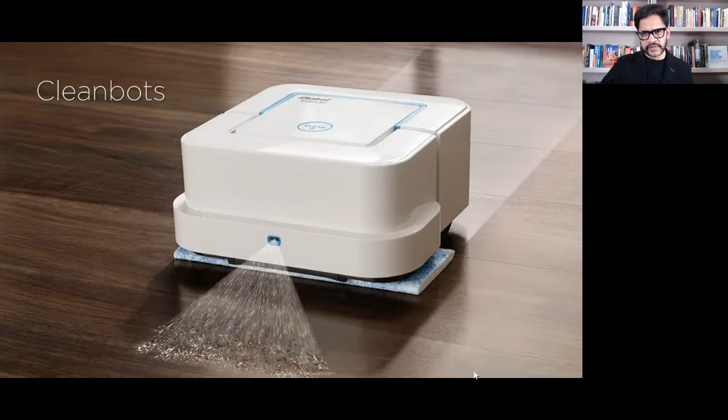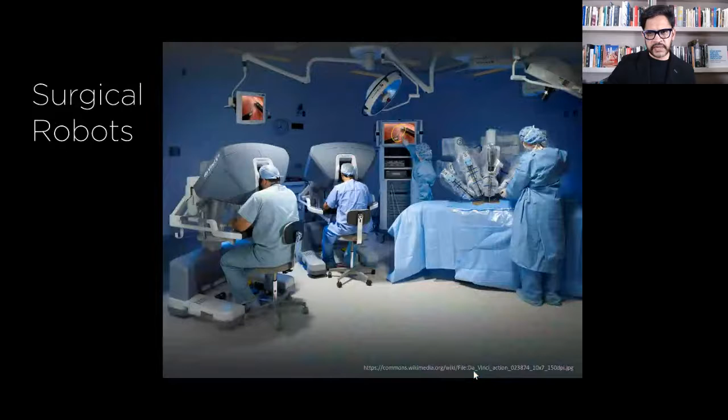So robots in the context of domesticity. Let's look at what is happening. Obviously, Roomba or Braava Jet in this case, or we have HVAC bots like Nest thermostat. If you put one in your home, it turns essentially the HVAC mechanism into a robotic mechanism. Sanitization robots, surgical robots, right? So there are lots of things happening, and the same thing in mobility.

If you look at the autonomous vehicles, humans try to figure out what is happening between the autonomous vehicles. And that brings up the question of interaction. So it's very important to understand that there are different kinds of interactions that we take into account: robots to humans, robots to architecture, robots to robots, and robots to humans and the environment that they are in. So there's always this kind of a multiple interactive framework that is going on that's important to consider in whatever we think about robotics.

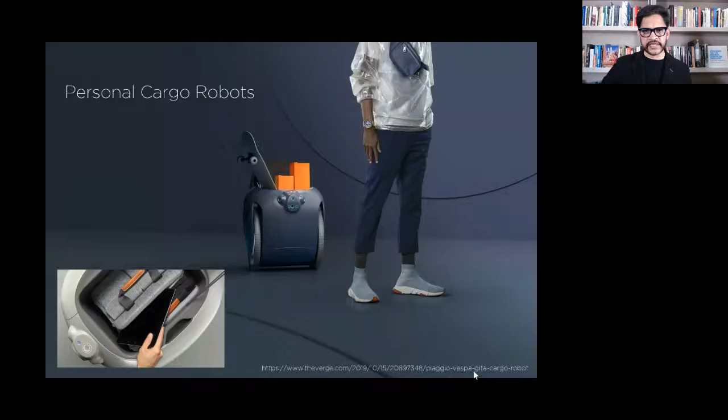And here is a little film that makes the case.

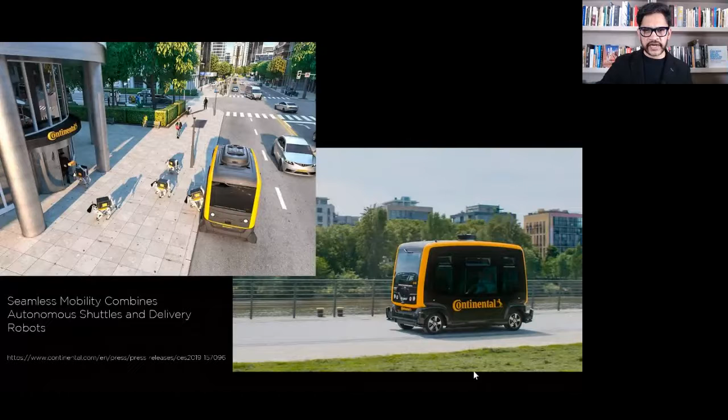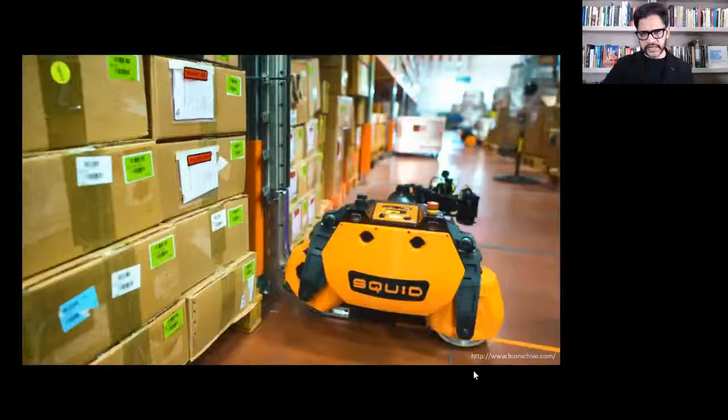So, and of course, warehouses - as we talk about more delivery robots, this becomes very common. In this case, it is a robot called Squid that is a warehouse robot that can do various things, such as package retrieval and management and delivery of various kinds. So that's that robot.

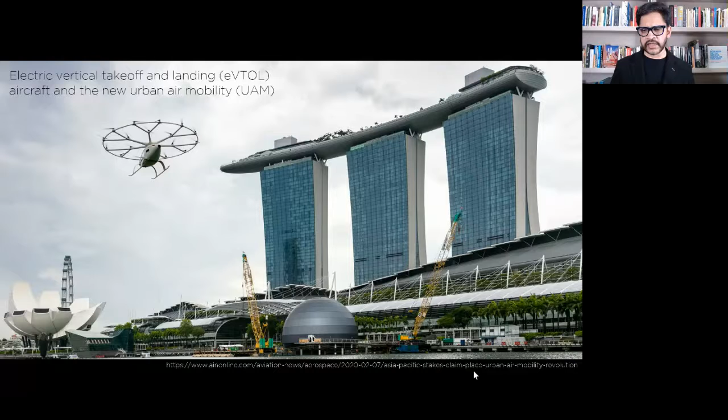So you get the idea there. We also have now the drones, which are robots essentially. People carrying drones are being experimented with actively around the world, and eVTOL solutions are considered a real possibility now in various parts. So we may see something develop from that.

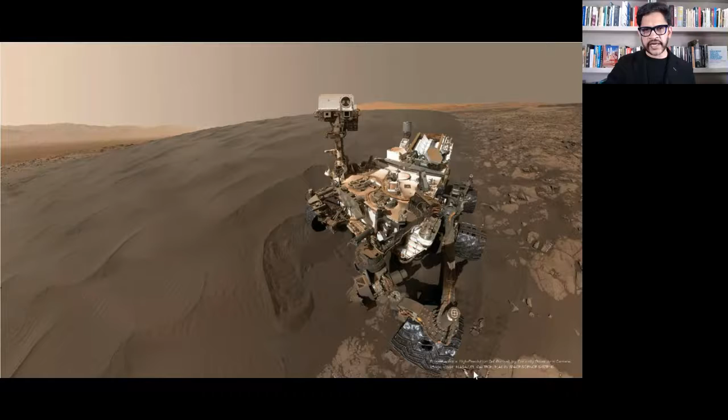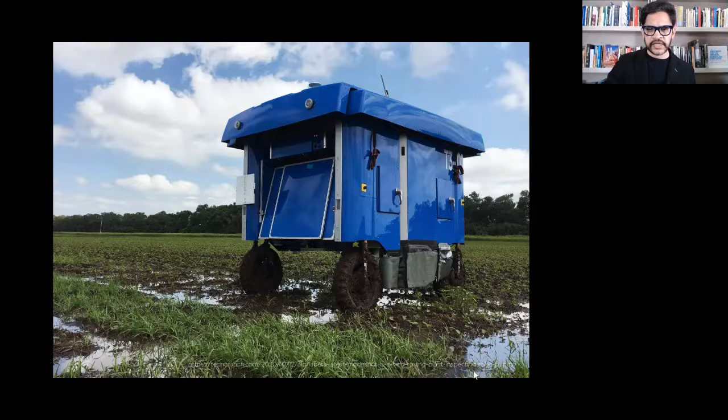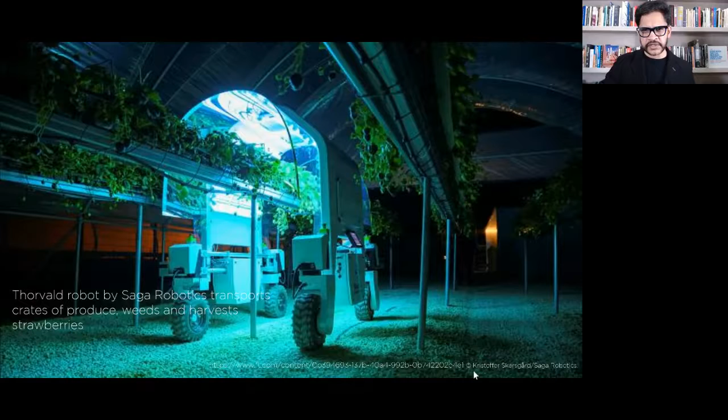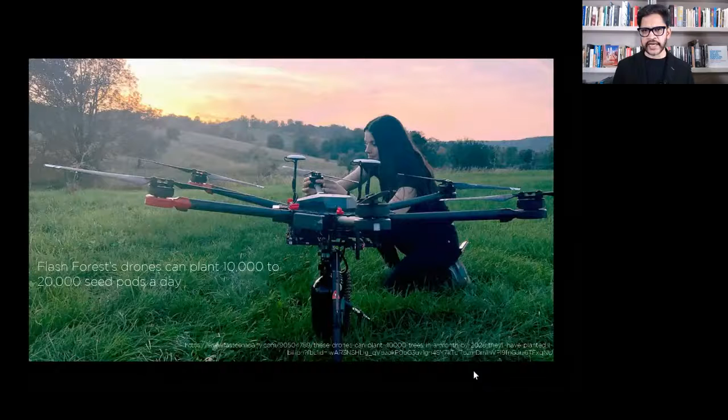And farming is being revolutionized. We have robots mowing lawns, or actually in the fields, on farms, doing a variety of tasks, such as this robotic tractor, or in this case, a Saga robot that is growing strawberries. So there are lots of solutions happening. This is a reforestation robot, a drone that can actually plant up to 20,000 seeds a day, making reforestation a fast and efficient activity that humans potentially cannot do or access.

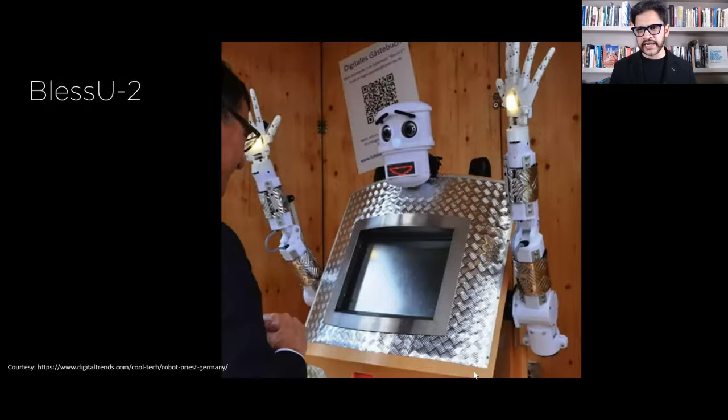So there are a lot of things going on, including, and if you think worshipping has been left out, think again. We got BlessU-2, an experimental robot developed in Germany that can bless in multiple languages. Go figure. That's already been done. And in China, there is a robot called Xian, a companion robot for Master Xian Fan, which does a variety of tasks that a monk should.

And so worshipping, we develop a certain relationship with robots, and it is a real relationship. Anything that looks and feels like living, we develop a relationship with it. Even without that, we do, but I think with it, we empathize. Whether that is naturally intelligent or artificially intelligent, it does not matter. What matters is that something has agency, that it looks like it is living, that it looks like it has agency, and we develop a relationship to it.

There are ethical issues involved. Robot ethics is an emerging field and a very important one at that. The point is, robots are not them. And the reason is, when we think about a robot, we always think of it as out there, somewhere else, not me.

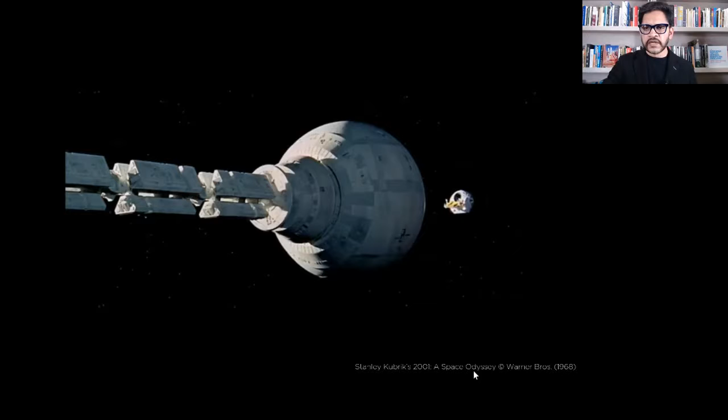And think again from these next ones. We have seen HAL 9000 and how it begins to basically break Asimov's rules, because it may be jeopardizing the mission. So let me move to yet another example here.

In this case, we're beginning to get into how humans interact with robots, and how robots begin to understand human emotions, human behavior, and such. That interaction is utterly important. They need to operate together. We need to work together. Without that, it is very difficult to make this work.

Interesting things happen. So in this case, let's look at how this particular industrial robot behaves.

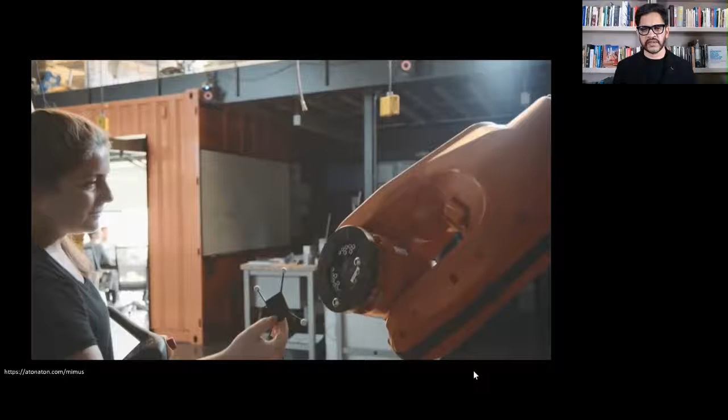Humans and robots are companion species on this planet. We need each other. But it's also a scary thing, it replaces the need for some of what we do of our own labor. In my mind, we need to change these systems from replacing human labor to augmenting, expanding, and incorporating humans into the process. The goal is to find the win-win, where what I do with a robot is exponentially better than what a person can do alone, or what a robot can do alone.

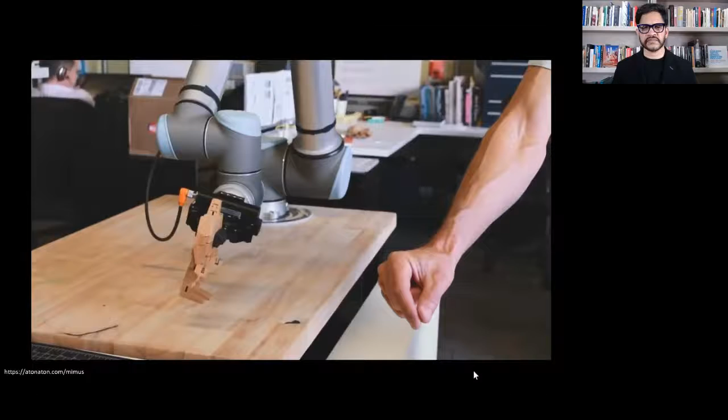What we see now is a global community of researchers, designers, and artists really challenging the basic premise of what these machines should be doing and can do. They can be basically reconfigured to put the human at the center of that experience and interaction.

We are in the Boston Dry Docks at Autodesk's brand new build space.

So this is the robot I've been working with for the past 10 weeks. This is an ABB IRB 6700, and it's a machine that can move up to 7 meters per second. It can hold 300 kilograms, over 600 pounds.

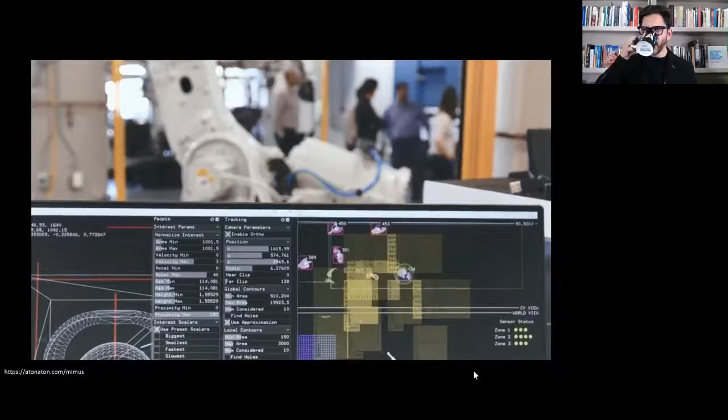What we did here is we gave this robot the ability to see us as we moved around in space around it. So we hooked up a bunch of cameras onto the ceiling, and we created software that lets the robot see basically the entire environment around it. What we're trying to show here is that with really simple tweaks to this existing technology, we can make it responsive to people and make it easy to use by people.

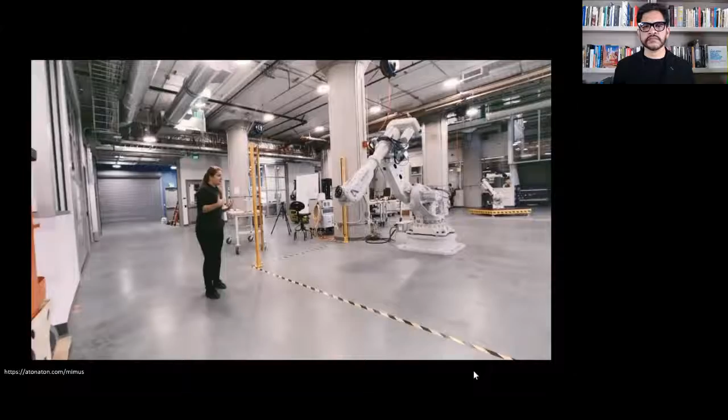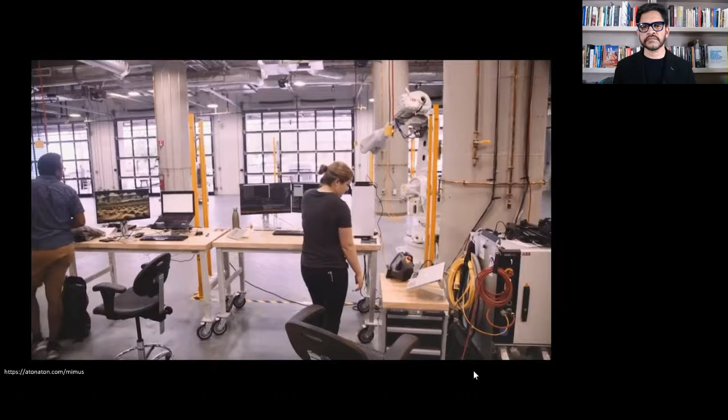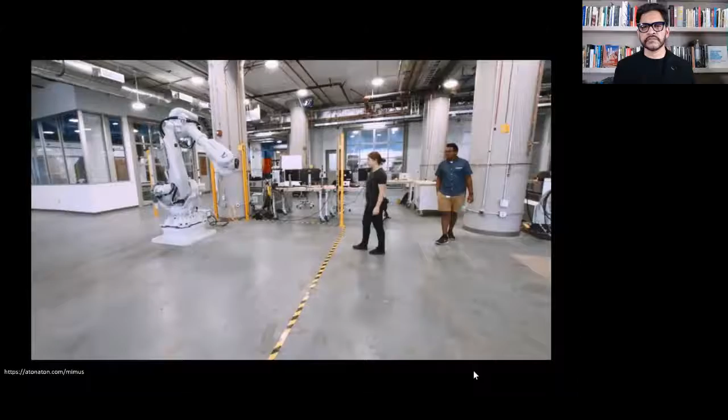So just through your natural gesture, the way you might communicate with another person, you can tell the robot to come a little closer, or to come over here to pick something up. A lot of what we're doing here is really pushing the boundaries of what natural gesture can communicate to this machine. The goal is to make this experience with the robot as intuitive as possible. The fact that you're getting constant feedback between what you're doing and how the robot is responding lets you discover how to control and interact with it.

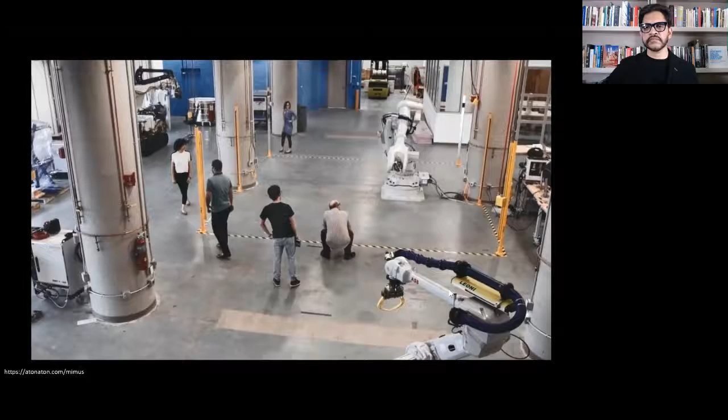Someone who's never even seen this robot before can begin interacting with it and controlling it. For people who have used and seen industrial robots, they've probably never seen it without doing something or having a tool on the end of it, like for spot welding or a gripper. So I'm hoping it's a new experience for them too, to see maybe more potential for it, because they've never seen a robot move quite like this, so open-ended.

There are really two sides of making this project and bringing it to life. One half is the engineering and logistics side, where you're on the computer 10, 12 hours a day. Then when everything comes together and you're in the space with the robot, you have a very raw experience with this animal-like machine responding to your every move, and all the technical aspects sort of melt away into the background.

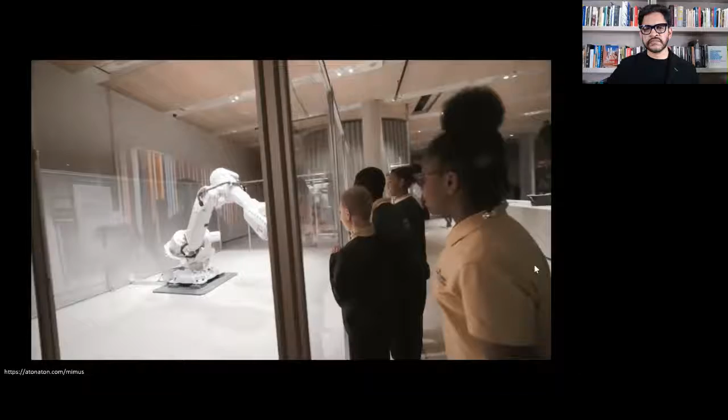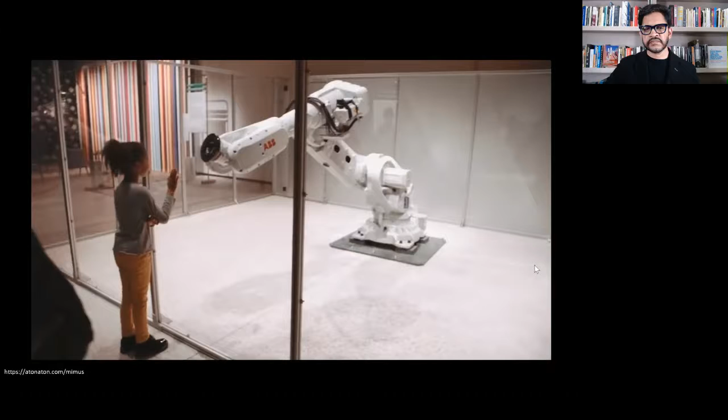It's incredibly important to have opportunities and spaces to come in and experiment and misuse these existing technologies, because that's how you find innovations around our current problems. By doing this, by open sourcing these tools and making them available, by sharing the knowledge behind this, and together as a community, we keep lowering those barriers and making it more accessible and exciting for people who don't see themselves as traditional roboticists or computer scientists, people who just want to nerd out about robots. You don't need to be an expert to do that. Everyone has permission to do that.

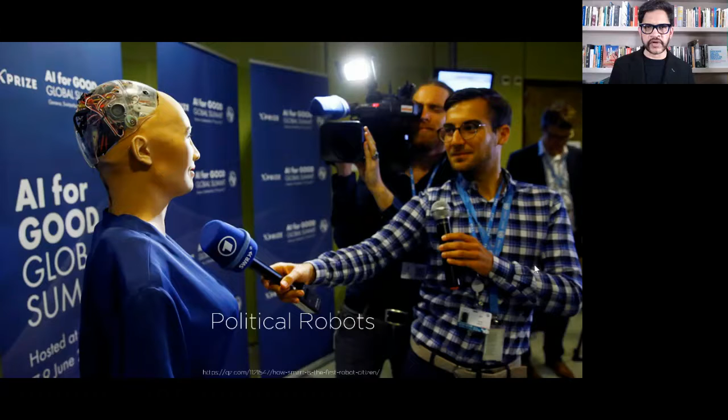So I just wanted to play that whole clip because Madeline Gannon, a researcher, makes a very good point about why we always tend to think of robots in a utilitarian framework. And so there is something for us to think about.

Can robots be just curious? Can they just be? Can they be without a purpose? Those are some profound questions we can and will ask as we move forward.

And that raises the whole question of what is it to be a robot, and what is it to be a human? So here we have Sophia, a political robot. Sophia has citizenship in multiple countries and can talk about a range of political issues. The human form combined with AI, in the context of a political atmosphere, an environment, a context, the robot has been extremely fascinating.

Now let's look at one more example.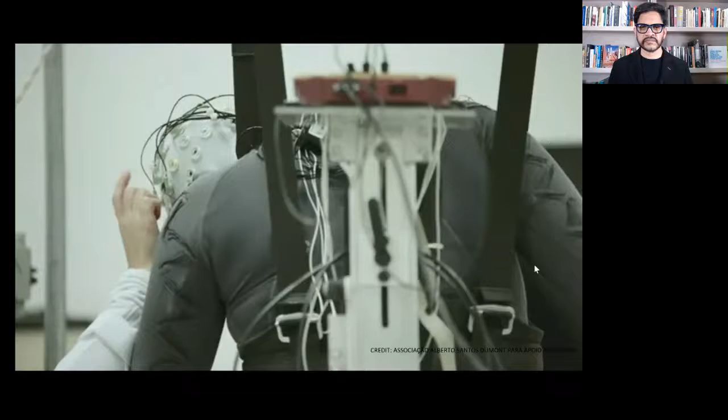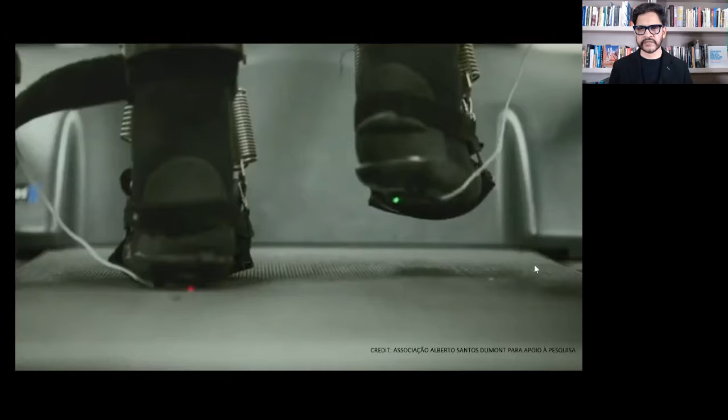In that case, what we saw was the fusion of the machine and the human - the biological and the mechanical, the biological and the cybernetic, coming together. There we don't quite know where the human ends and the machine begins, and vice versa. So it's not the other. You see, that's the point - we tend to think robots are the other, but they are infused or integrated, and we are going to see more of that.

So in this case, wearable robots are another way that robotic agencies become part of the human agency, the biological agency. Colleague Behnaz Farahi has experimented with wearable robots and robotic garments, if you will, that are responsive.

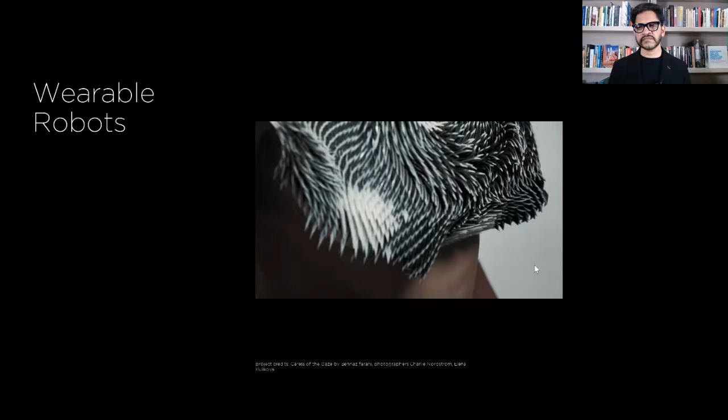So I just wanted to provide us all of that context in order to understand that when we talk about robots in architecture, we tend to only talk about a certain tiny segment or slice of what robots are and what robotics is, and as an extension also talk about AI and other concepts and notions.

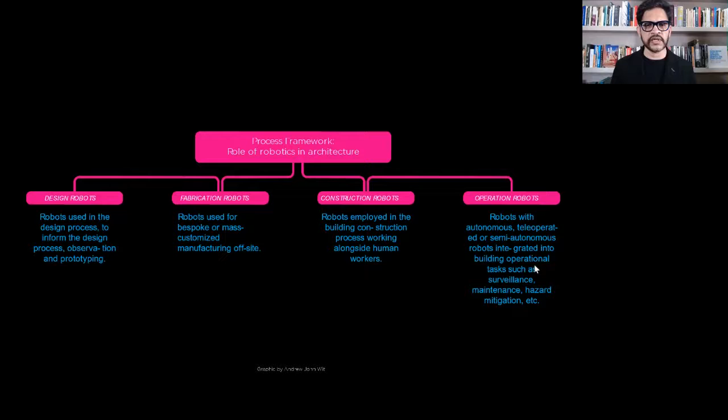So I wanted to talk about construction robotics, where we are and where we are headed. Within architecture, there are a variety of stages where robots could play a role and do play a role: the design stage, fabrication, on-site construction, or operation of the buildings and environments.

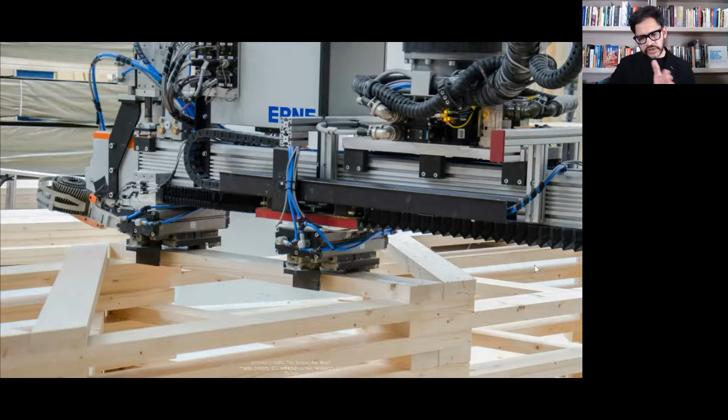Let me talk a little bit about where we are. By the time I'm showing this to you, these are already 3, 4, 5 years old, but probably new to many in the industry, where the robots are beginning to do certain things.

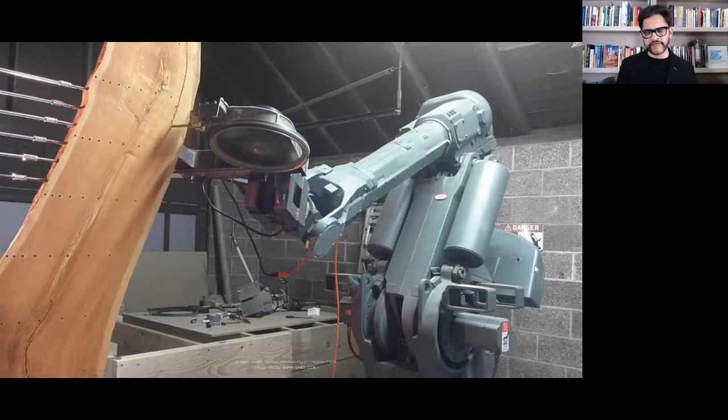You can put end effectors at the end of industrial robots, as Madeline Gannon did. She put a camera and the ability to respond. In this case, it's a bandsaw that can very carefully slice through a piece of wood along its grain, or a foam cutting robot.

With that, certain things are possible, like this. Our colleagues from across the river at MIT have done this foam tower.

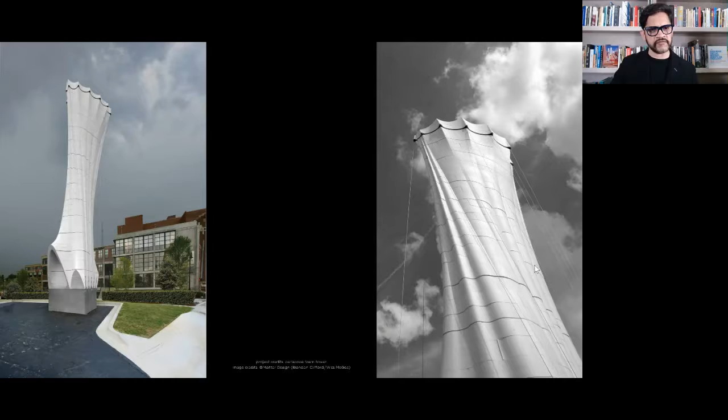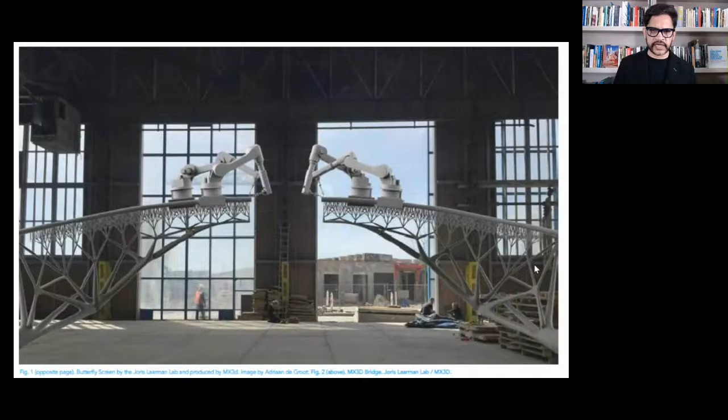And in Europe, we've seen 3D printing metal in thin air. Such things are becoming possible that would be very difficult or impossible to make in some cases without those technologies. Again, 3D printing metal, and in this case, bridge building robots that have been experimented with in the Netherlands.

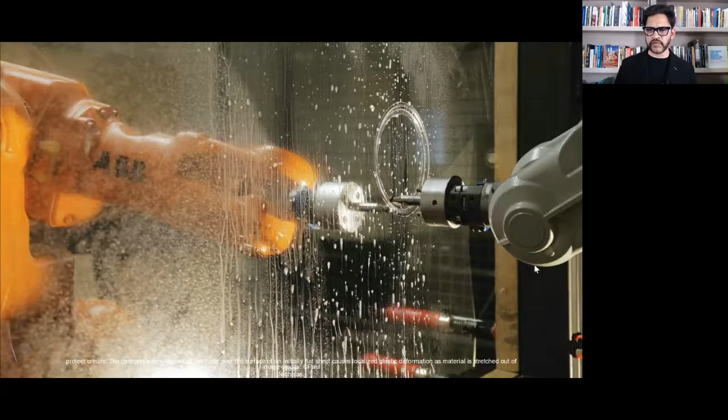Robots working in tandem, denting sheet metal, in this case, to create structurally sound constructs that could do things like a bridge or a structure like this, all using simply denting. They have used machine learning to understand the material conditions that are anisotropic, so you have to read the variability within the material and how far to push it when denting.

How far do you push it? This material computation, some of what Neri Oxman talked about in the morning, talks about material computation or material-based computation, and this is one of those with metal.

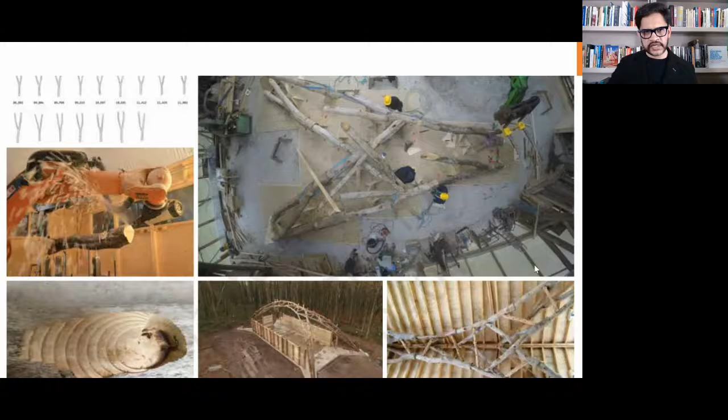At Architectural Association London, they took an industrial robot into a forest, and they harvested certain forked tree branches, and with that, they essentially constructed this pavilion in the middle of the forest.

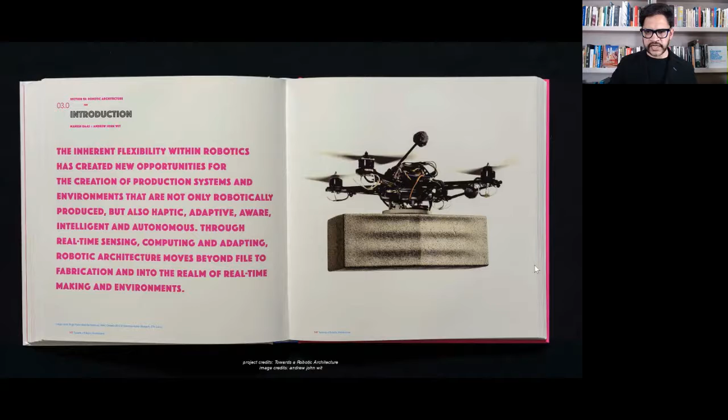So such things are possible. And you've probably seen this, some of you. If not, it's always fun to watch how drones have made a structure like this. This is at ETH, and they have built an interesting structure.

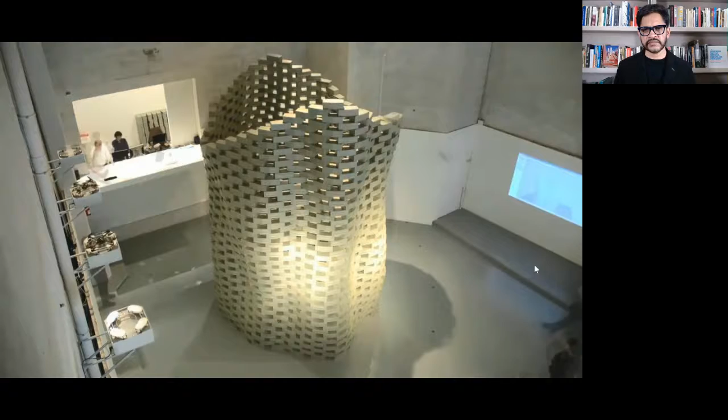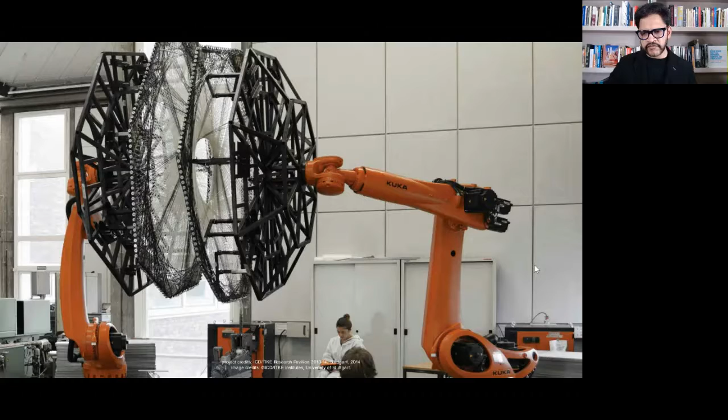It's kind of reminiscent of honeybees building a hive, or things like that. So different forms of robots doing different things. In this case, weaving, spider-like weaving of carbon fiber, and pavilions constructed out of it, very lightweight, very different, very new, and new possibilities being revealed by these technologies.

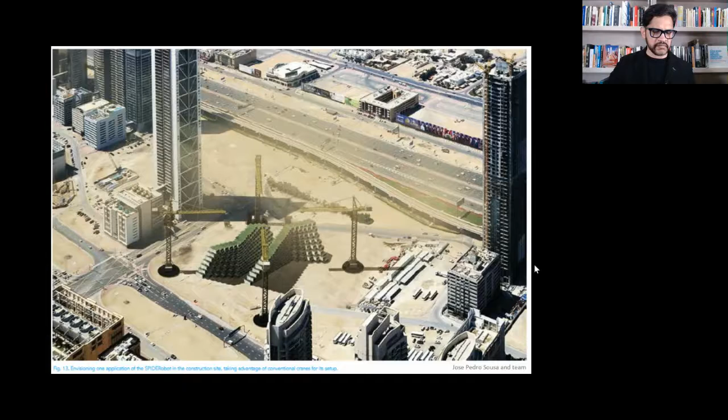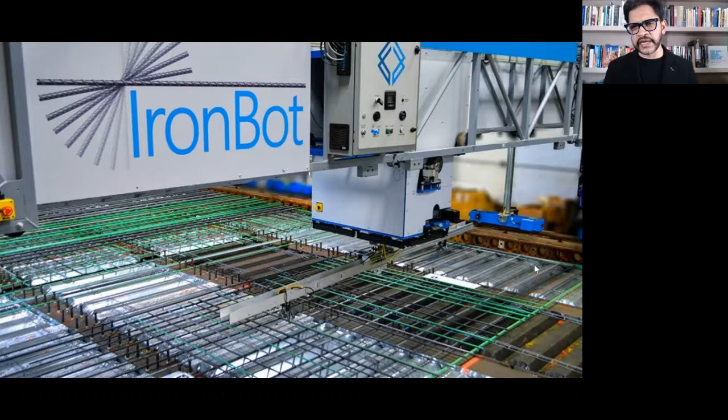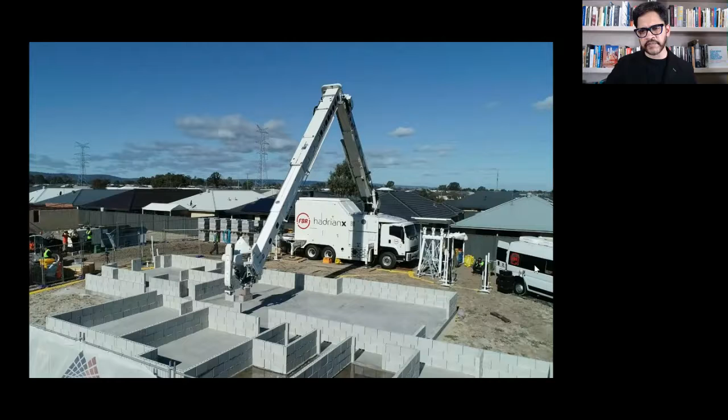In this case, the IronBot does basically laying out, tying, and working with rebars. We've already seen this, either block laying or 3D printing at house scale, building scale, or painting. So we have seen these specific tasks being accomplished.

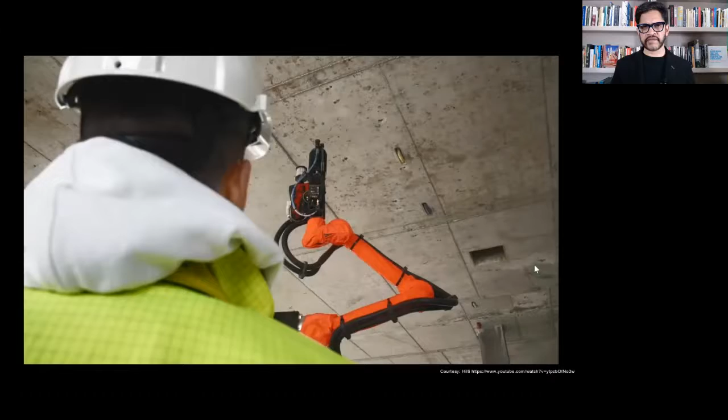Introducing the Hilti Jaibot, a semi-autonomous robot for ceiling installations, helping you to deliver MEP projects on time.

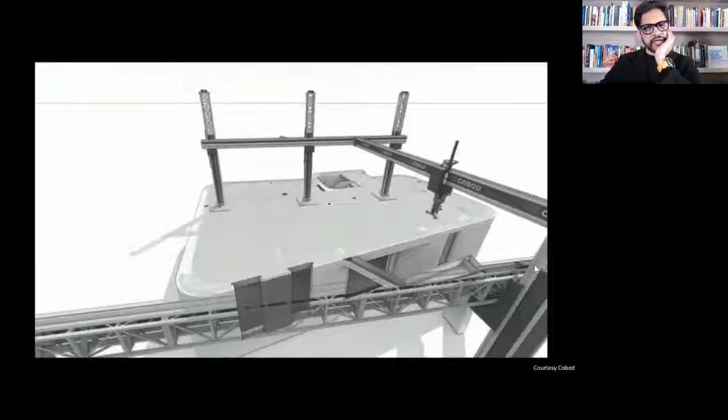So again, we see this notion of humans and robots working together, and this is Cobod's 3D printing robot. Built with an autonomous printing machine capable of working day and night, this model is the most innovative and intricate 3D printed house to date.

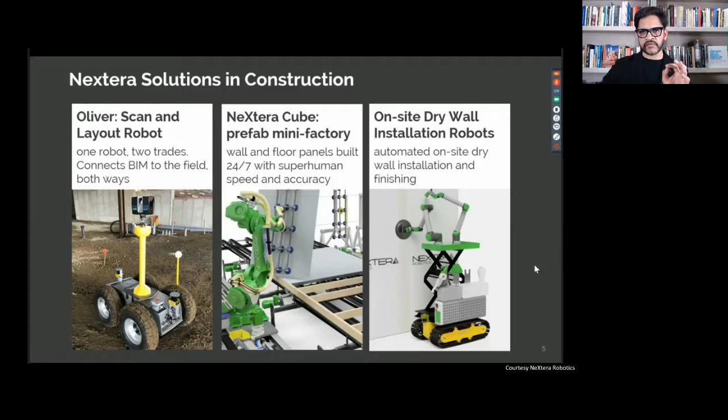We saw this morning, Rafat was showing some of these examples, Oliver showing where it can scan and lay out, or Nextera's Cube, which is a mini factory you can have on site, or drywall installation robots. So there are a number of things. I cannot tell you how many startups are working around the world on these kinds of tasks.

So at a certain point, there is going to be a tipping point reached. When it is, we don't know. Where it is, we don't know, but there will be one. And that leads us to another question of robotic architecture: can buildings themselves be robots to live in? Yes, it is possible, and I'll give you some examples of that.

So there are different ways of framing it. One is robotic components or robotic systems, like HVAC systems or various mechanical or electrical or other kinds of systems, or robotic structures, where the structural systems themselves can be responsive, or robotic space, where the whole building could be a robot to live in.

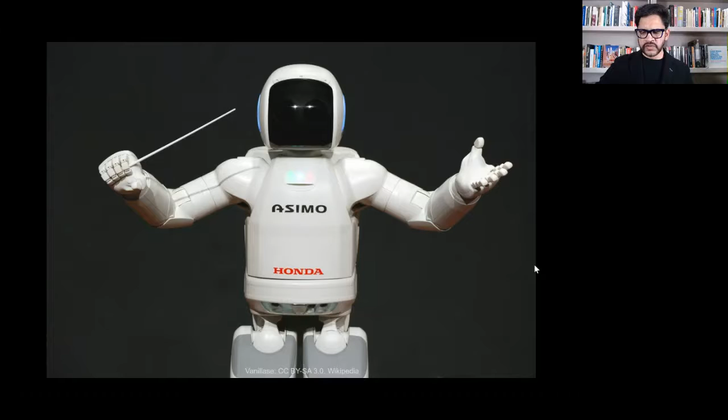So that brings us to a conclusion here, and let me now get out of this presentation and have a conversation with you. So, all right, so there we are.

I wanted to give you a broad sense, a broad scope of what is happening, get a comprehension of all the fields being impacted by robotics, and how to think about them in the context of what we do. Why? Because as architects, designers, landscape architects, interior architects, and designers of any kind in general, we have to be aware of the kind of environment we are being asked to shape, to respond to, build for, and what are the possibilities.

And as we have seen, every scale is impacted, every field is impacted. So the question for us is, how do we play a role in shaping this revolution? This is a revolution, let's not mistake it. My daughter the other day was doing a social studies assignment about how robotics are impacting society. So children in schools are talking about it, learning about it. So how do we as designers play a role in shaping this?